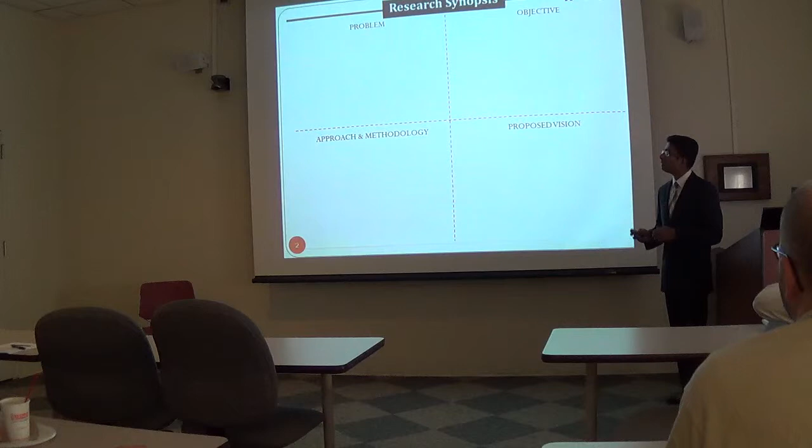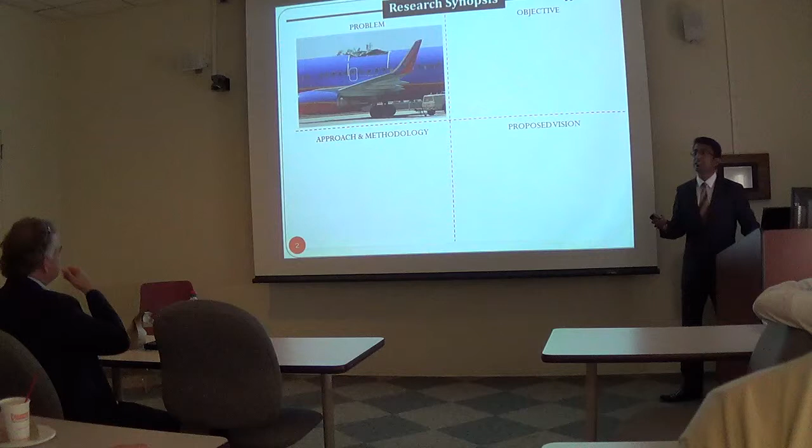Before I get into specific details of my research, I'd like to give a brief description of the research process. Currently, aerospace structures are inspected every year or two, and between inspection cycles this leads to unexpected damage mechanisms because of the complex loading phenomenon seen during the normal span of an aircraft structure. This complex loading profile leads to the development of unexpected damages between periodic inspection cycles. Thus there is a clear need to shift from the current periodic-based inspection technique, which relies on a number of years or flight hours, to a more thorough approach.

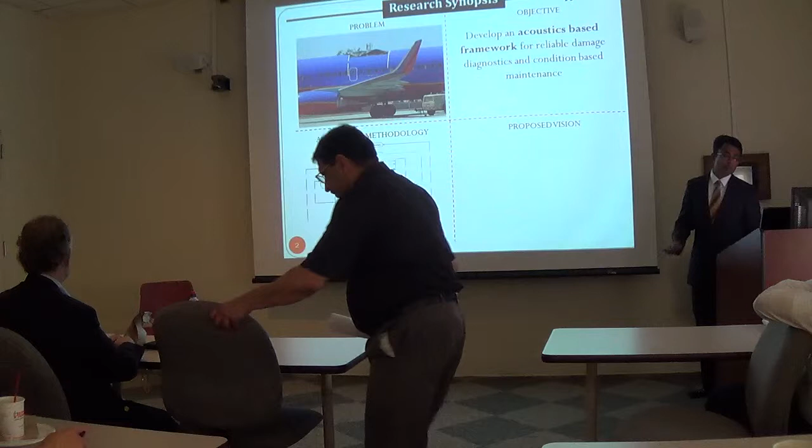So this is the outline of the talk I'll be following today. I'll begin by giving a brief motivation and introduction into the acoustic emission method. Then I'll talk specifically about the novel NDE framework I'm utilizing in this research and show how this framework is used for 4 different cases.

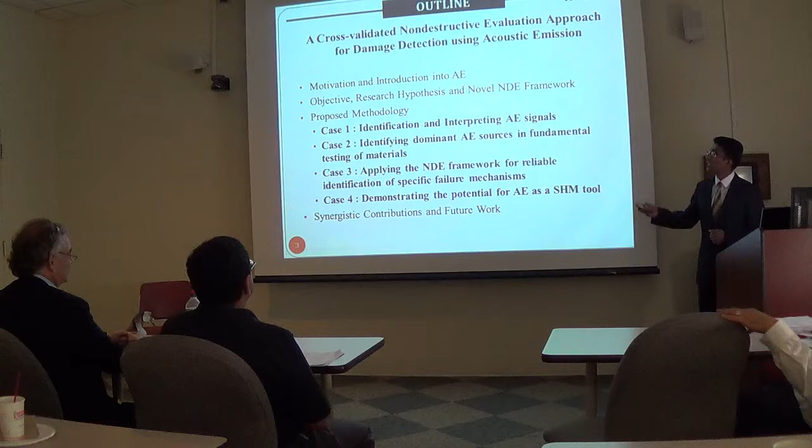And finally, conclude by highlighting some of the major contributions of this work.

As I mentioned previously, the complex loading phenomenon experienced by an aircraft during its normal service life leads to the development of unexpected damages between periodic inspection cycles.

A case in a recent example is the mid-air rupture of a Southwest airline in April 2011, when a section of the roof of the aircraft flew off in mid-air, causing massive depressurization. Notably, a comprehensive D-check was performed on this aircraft prior to this incident, and no ominous signs of cracking were detected during this process.

Thus, there is a clear need to shift from the current periodic-based inspection techniques to condition-based inspection techniques that in real time pick up damages and can reliably provide the physical integrity of the structure.

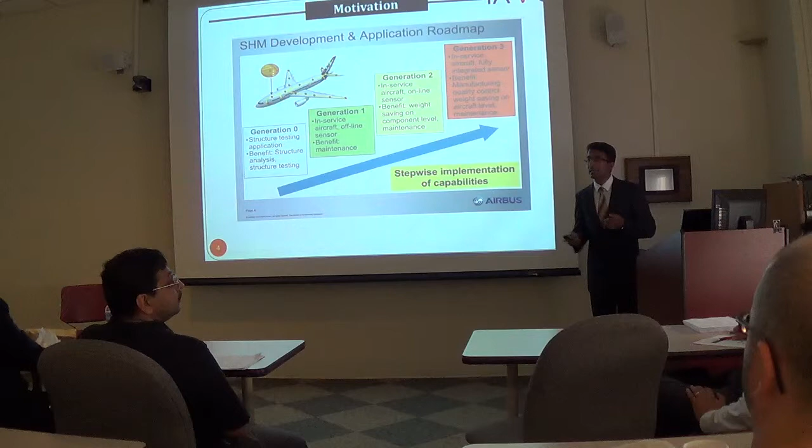Along these lines, Airbus has now developed a future roadmap for structural health monitoring of its aircraft with the ultimate goal of applying onboard sensors to detect in real time the damage diagnostics of its future aircrafts.

However, this research is motivated specifically by a 3-year research grant that was provided to us by the Office of Naval Research to particularly investigate and identify the initiation of cracking in metallic specimens.

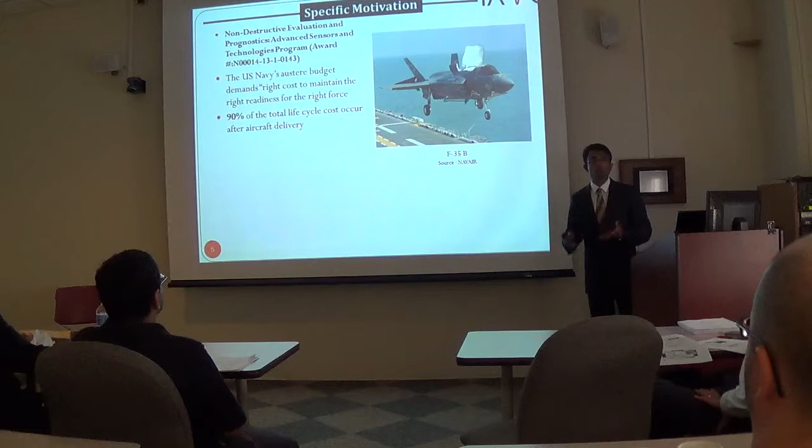The motivation behind this was driven by the fact that the Navy wanted to find the right cost to maintain their fleets, where they found out that at least more than 90% of the total life cost was associated after the aircraft delivery. Consequently, the Navy also designed the structural health and usage monitoring program with the goal to continuously monitor their aircraft structures and also prevent Navy fleets being retired much earlier than their expected fatigue life.

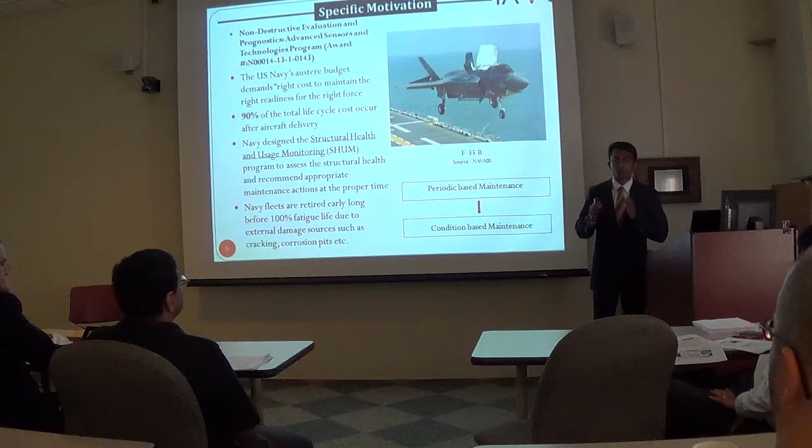So very similar to the commercial sector, the Navy also wants to shift from periodic-based inspection methods to a condition-based maintenance approach that provides targeted evaluation and real-time information about the integrity of the structure.

So in order to realize these condition-based maintenance procedures, there is a need to shift from current offline inspection to online-based inspection techniques. For this purpose, we utilize structural health monitoring approaches.

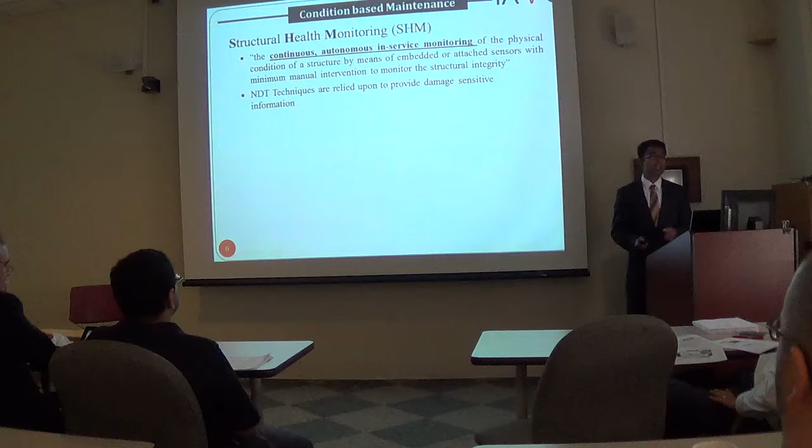Structural health monitoring is the process of applying continuous, autonomous, in-service monitoring of the physical integrity of the structure by attaching embedded or attached sensors with minimal manual intervention to monitor the integrity of the structures.

Now, in order to identify certain damages, certain NDT techniques are utilized to provide sensitive information about the damage. But a clear distinction must be maintained between non-destructive evaluation and structural health monitoring.

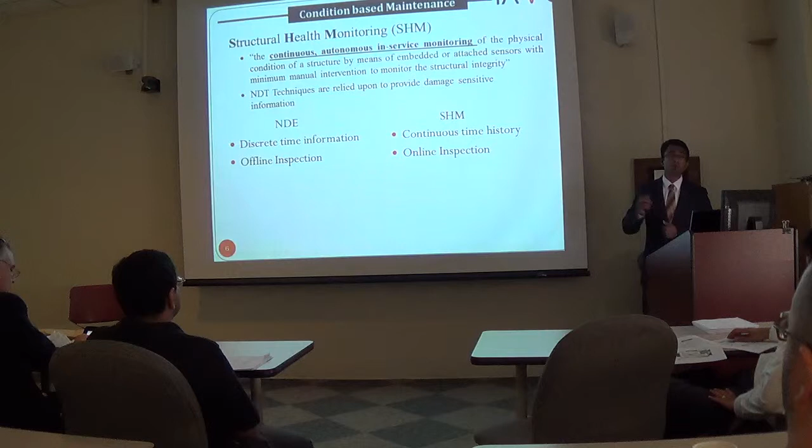Non-destructive evaluation typically provides discrete time histories about the damage in the material, while structural health monitoring approaches provide a more continuous time history about the physical integrity of the structure, and thus can be utilized for both initiation and the development of damage.

The other difference between NDE and SHM techniques is that NDE methods are typically carried out during offline inspection, while structural health monitoring approaches are carried out during in-service or online monitoring, and thus can provide early signs of catastrophic failure and ensure public safety and structural integrity.

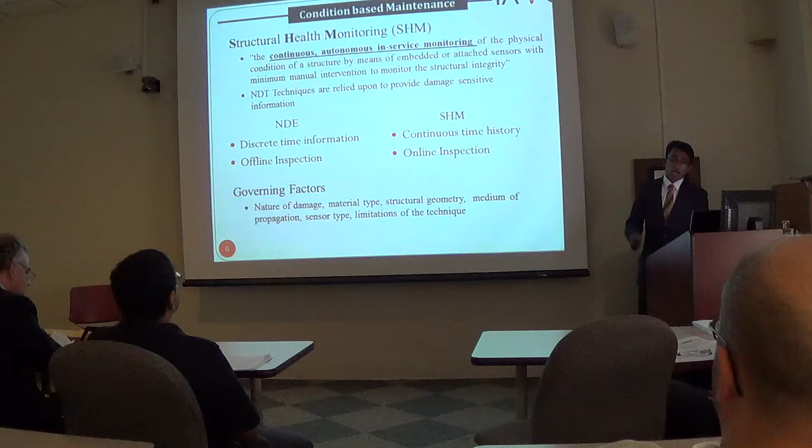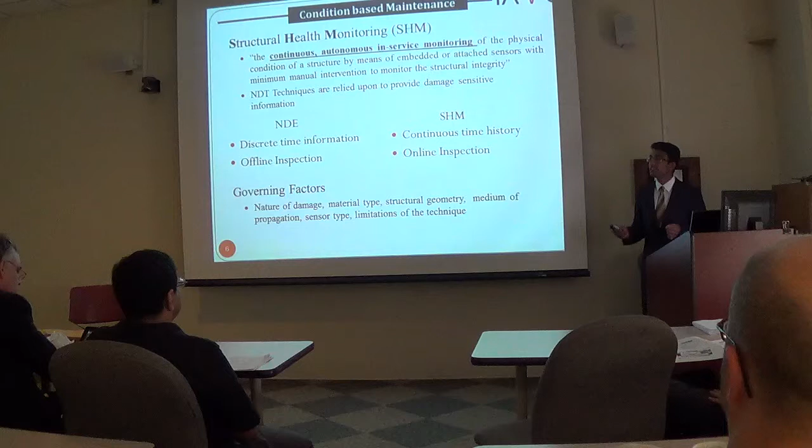Nevertheless, in either approach, in order to optimize the damage detection procedures, certain factors must be considered, such as the nature of the damage to be investigated, the material type, the structural geometry, the sensors, and also the limitations of the applied technique itself.

So some of the commonly seen damages in aircraft structures, for example in metallic structures, range from crack initiation to crack growth to impact damage and corrosion. In composites, the prime failure mechanisms range from debonding to delamination, moisture and water penetration, and other damage such as impact.

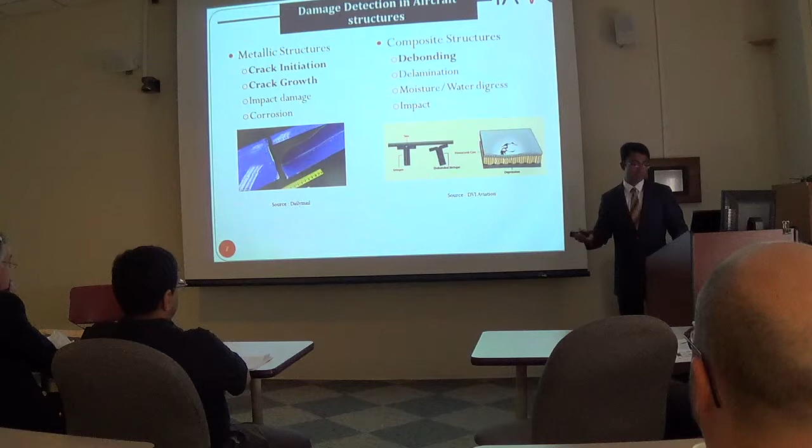Now, in order to pick up these damages, the commonly used NDE methods currently range from visual inspection to ultrasonic testing, thermal imaging, eddy current, and also acoustic emission testing.

Perhaps among these techniques, acoustic emission testing is the only technique that can detect both the initiation and the development of damage in real time, and thus provide a basis for implementing condition-based structural health monitoring approaches.

Secondly, acoustic emission can also be utilized in real time to detect the region or location of damage, which can then be used as an intelligent method to deploy other extensive NDT methods to specifically look at certain regions, thus saving time and cost for damage inspection.

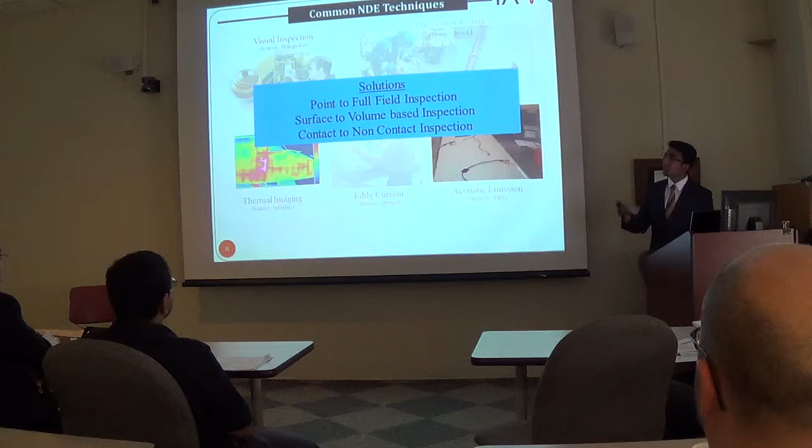These solutions range from point to full field inspections, surface to volumetric-based inspection techniques, and also contact to non-contact inspection techniques.

As acoustic emission technique has the potential to shift from the current offline inspection process to an online inspection process, acoustic emission testing is utilized as a prime monitoring technique in this research.

Before I show some of the specific results that I've obtained during the AE testing of the different materials, I would like to touch base on the concept of acoustic emission. Acoustic emission is the release of transient elastic stress waves produced by the material as it is being stressed due to localized sources such as yielding, twinning, cracking, debonding, and so on.

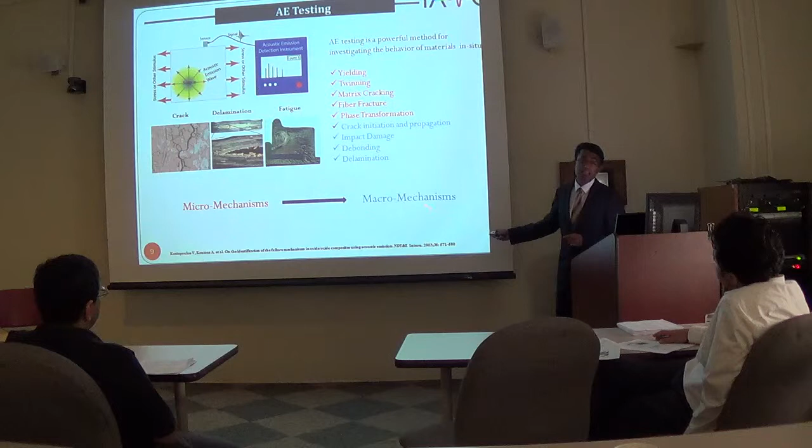What is more important to note is that the same acoustic emission testing technique can be utilized in real time to detect both the micromechanisms and the macromechanisms, which forms the basis of identifying initiation and the development of the damage.

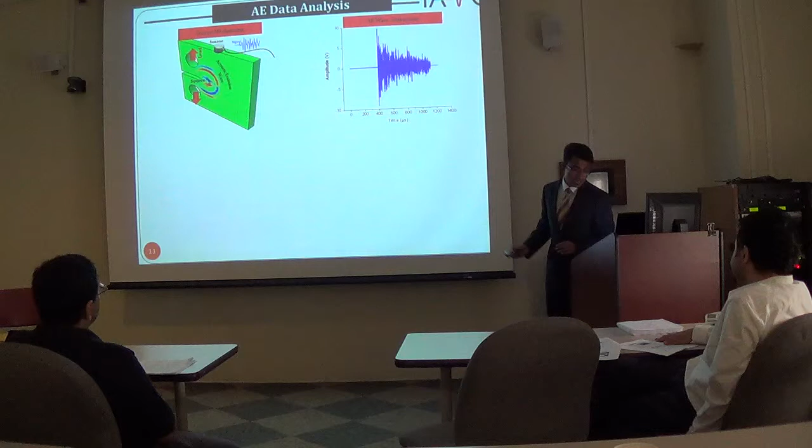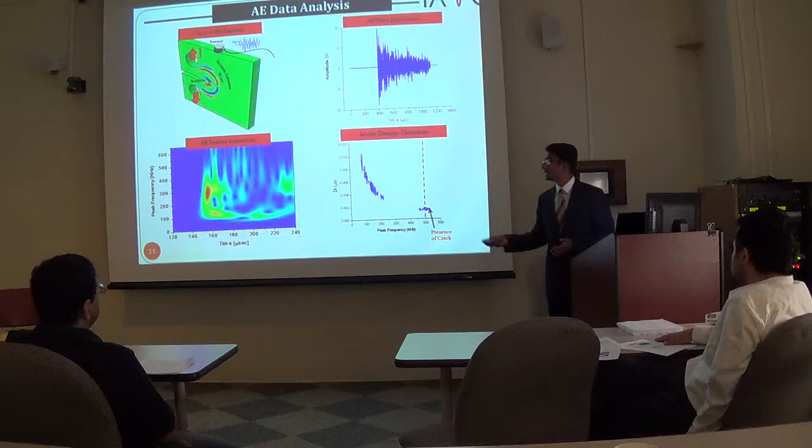And the waveforms that are detected are of similar characteristics as the one shown here. Advanced signal processing techniques are then applied to extract features such as frequency analysis and other types of analysis, and hopefully design novel AE damage detectors to reliably flag the presence of damage for real-time applications.

Now, the commonly extracted AE waveforms during the testing fall into two basic categories: one is the burst type emission, and the other is the continuous type emission. The burst type emissions have a signature as shown here, with very little activity in the pre-trigger, while the continuous acoustic emission have an AE signature as shown here.

Now, based on these extracted AE waveforms, several AE features are extracted using signal processing techniques, and these are some of the commonly used AE features that are cited and used for different AE analysis.

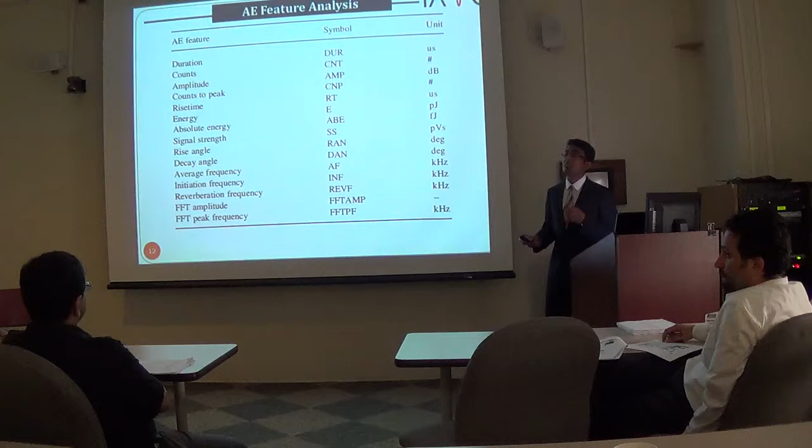However, in our research, I wanted to go a few steps further and develop both novel AE descriptors and also advanced AE feature descriptors that are reliable to damage detection.

So for that purpose, the AE waveform that was extracted during the test was comprehensively analyzed and shifted to the frequency domain using FFT algorithms.

So in addition to picking up the peak frequency, other advanced frequency analysis was also performed to identify the frequency centroid.

Further, the FFT algorithms were then dissected carefully into four specific spectral ranges, and the percentage of energy in each of these spectral ranges was then calculated and seen to be correlated with the applied loading conditions.

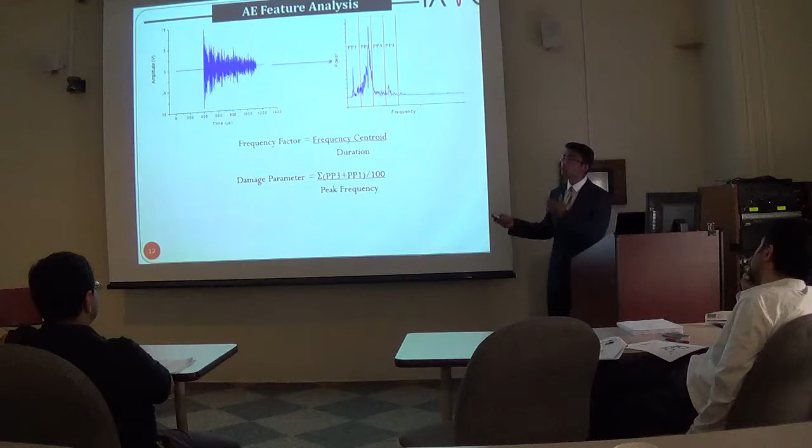Consequently, based on these advanced AE analyses, novel AE feature descriptors were then designed based on the relationship of these features and also the relation of these features to the conventional AE features. These are two of the common AE feature descriptors that I've designed, in addition to a few more.

Now, the other important factor that's supposed to be understood with acoustic emission testing is the actual AE wave phenomenon that happens in the material. To ensure the reliability of damage detection using acoustic emission, it is important to understand how the waves are produced and propagated in the material.

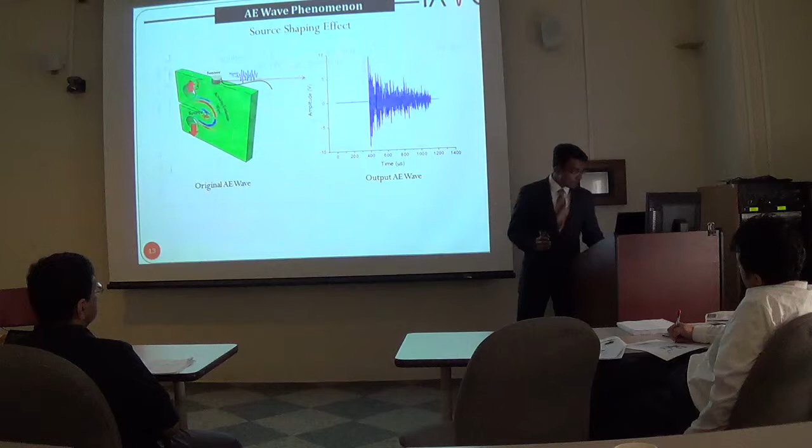For instance, the original AE waveform that is developed, that is produced by the material due to damage, and the final AE waveform that is picked up by the sensor do not share a linear relationship. In fact, the final AE waveform that is picked up by the sensors is actually a convoluted transfer function of several different mechanisms.

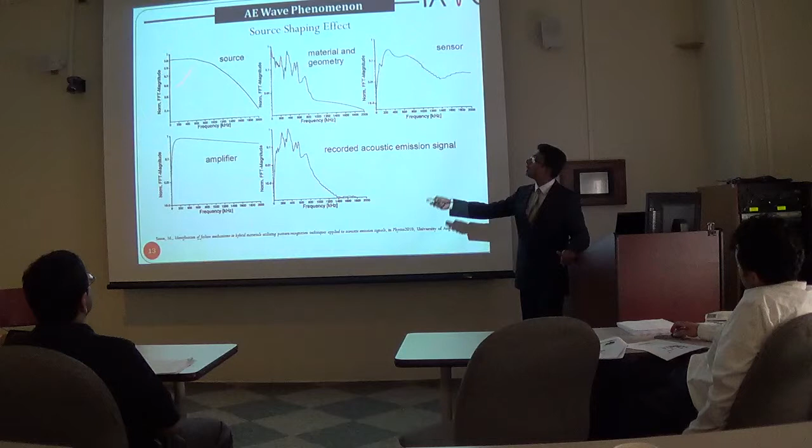For instance, the initial source AE waveform has a frequency characteristic as the one shown here, but as it propagates in the material and the geometry, it is severely colored and affected, which is further affected by the utilized sensor and the instrumentation that is in the test. Thus, the finally observed AE signal is a convoluted function of all these different mechanisms.

And that is in fact one of the main reasons that make acoustic emission a complex NDT phenomenon, and in certain cases very challenging for damage detection for field applications.

Thus, in order to interpret and identify reliably and cross-validate the AE signals that were obtained during the test, a full field optical metrology technique was extensively utilized in this research, which is called digital image correlation.

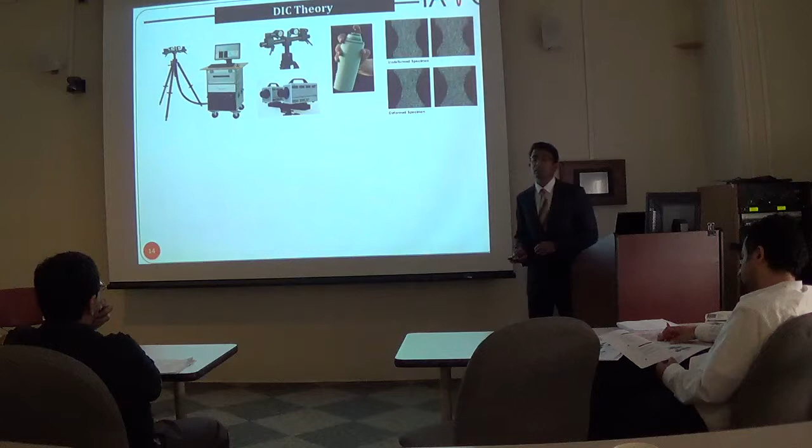The digital image correlation is a full field optical metrology technique that measures the full field deformation and strain on the surface of the structure. A speckle pattern is applied on the surface, and stereoscopic vision is utilized to correlate images before and during the loading phenomenon to obtain the final strain maps and displacement maps.

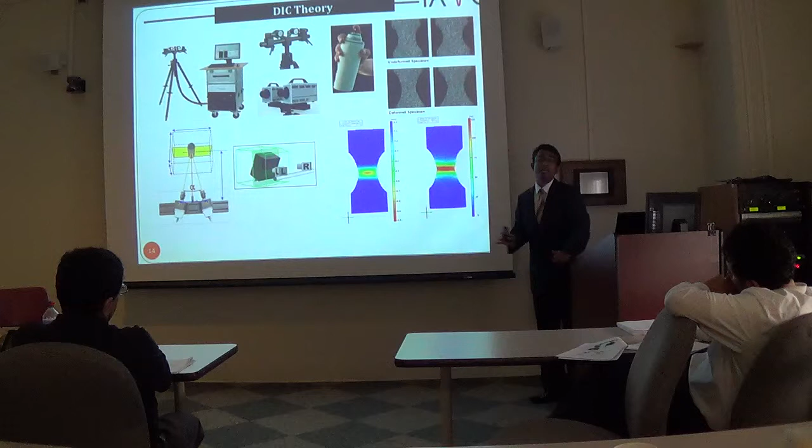So as you can see, the DIC adds a new visual dimension to the interpretation of the AE signals, and can also be utilized to correlate full field mechanical parameters to AE features to reliably validate and interpret the AE signals.

The widespread use of acoustic emission has been mitigated due to several challenges. Four main challenges are related to the high sensitivity to noise, the complex skill required in interpreting and separating the primary or dominant AE sources in the material, the complex wave propagation phenomenon described previously, and finally the lack of developing reliable damage parameters that are irrespective of geometry or loading condition and can be transferred from lab scale to field scale.

In order to address these challenges, this research specifically designed three objectives. The first is the design of a novel, cross-validated acoustic emission NDE system. The second is the development of filtering, post-processing, and classification algorithms to identify reliable trends sensitive to damage. And finally, the identification of failure mechanisms using novel AE damage parameters.

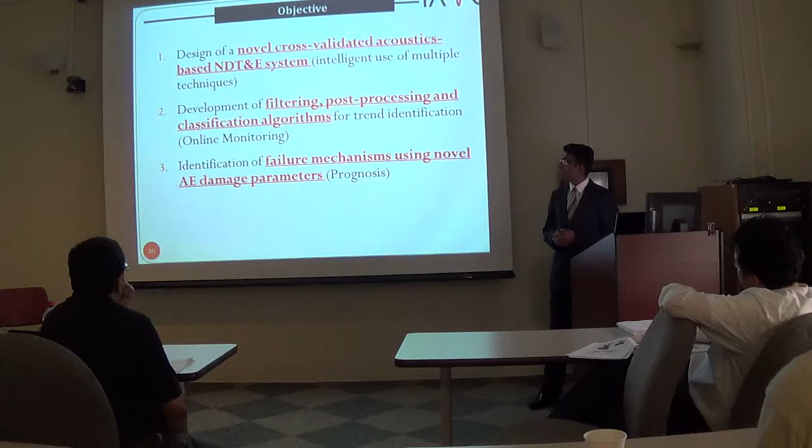The major contributions of this work include three things. The first is the unique hardware integration of the full field technique, the DIC, with acoustic emission itself, using in-house developed hardware protocols where DICs are self-triggered based on certain AE indications with minimal manual intervention. The second is the shift from conventional AE feature analysis to more advanced frequency analysis and the development of novel AE feature descriptors to reliably flag the presence of damage. Finally, the use of multivariate data fusion approaches where features from multiple NDT techniques are combined to reliably quantify damages.

The current state of the art of acoustic emission testing falls into three main categories: operational evaluation, data acquisition, and data interpretation or evaluation, sometimes also referred to as data mining. Specifically, the acoustic-based framework developed comprises four major steps.

The operational evaluation stage is where careful experiments are designed and loading conditions are determined. The second stage is data acquisition, literally the heart of this framework, where unique hardware protocols are developed to synchronize and trigger the full field techniques with acoustic emission testing, which is now being submitted for a patent application and was provisionally published in 2013.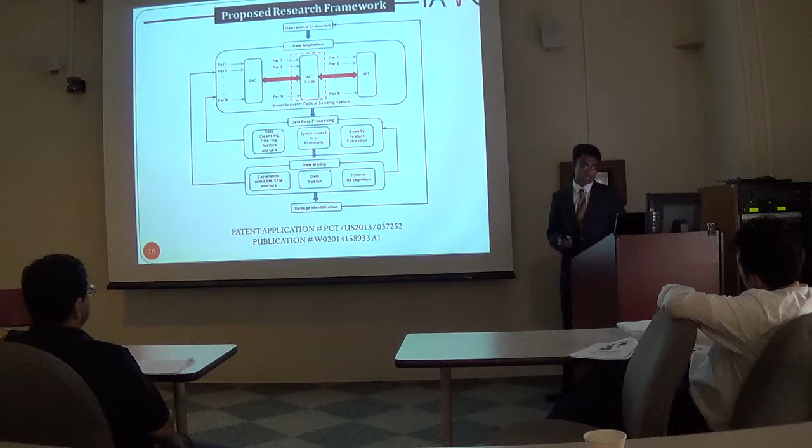To interpret and reliably identify AE sources in material, six critical steps are taken in this research. The first is modeling of acoustic emission waves in materials to understand how the wave propagates and is affected by structural geometry or other features.

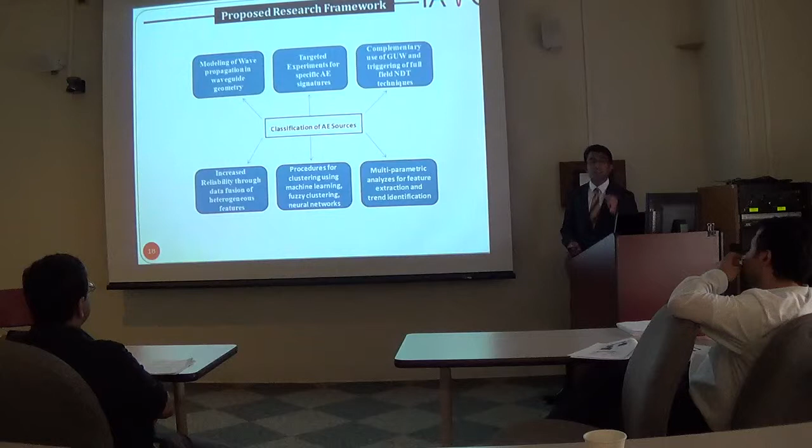Targeted experiments are performed to identify specific AE signatures for damage detection. The third step is the use of complementary full field techniques to aid in interpreting unknown AE signals obtained in real time. The fourth and fifth steps include advanced signal analysis to extract sensitive parameters, with the fifth step including designing novel AE feature descriptors and data fusion algorithms to reliably detect and quantify damage.

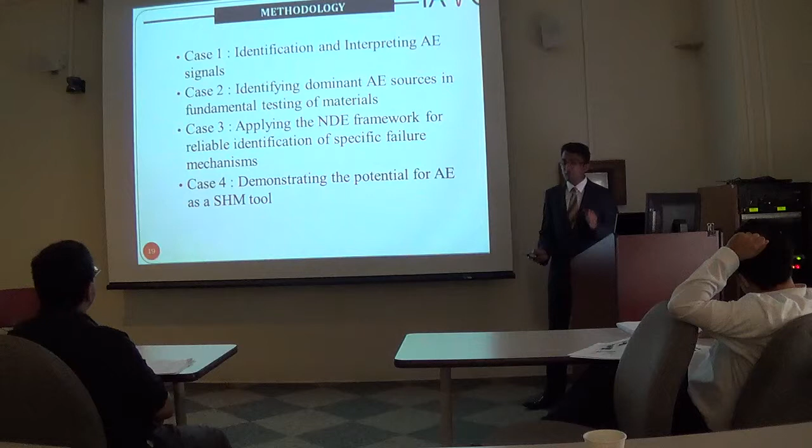The advanced AE feature analysis developed previously was then utilized to see if it has the potential to identify and interpret known AE sources in materials. For that purpose, four known AE sources were simulated on an aluminum 2024 plate.

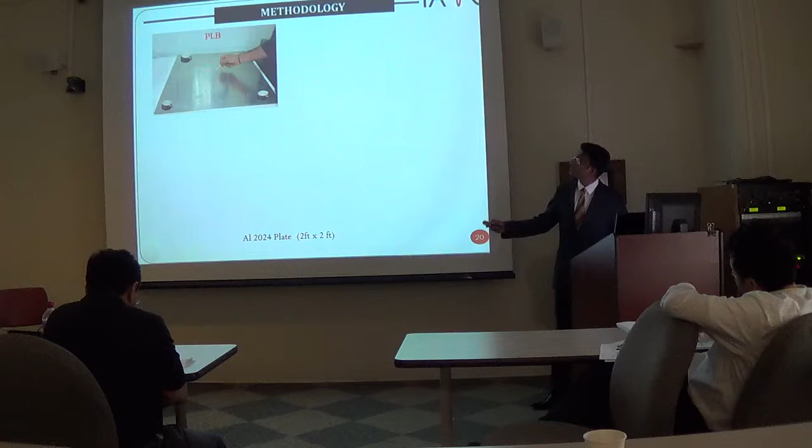The first source was a pencil lead break test, an ASTM standard used to calibrate AE sensors during a test. Four sensors were placed on the edges of the plate, and three other AE sources were also simulated during the test, with sensors placed at the same locations throughout all four sources.

The goal here is to see if advanced frequency analysis or advanced feature analysis has the potential of separating these known AE sources in the test.

Another thing to note is the pre-trigger activity. Signals that have a burst type emission have very little pre-trigger activity, while signals that produce continuous type emissions, such as noise and other secondary sources, have significant pre-trigger activity associated with them. Thus, it is essential to have valid pre-trigger activity in order to separate and provide insight into the potential source mechanisms of the material.

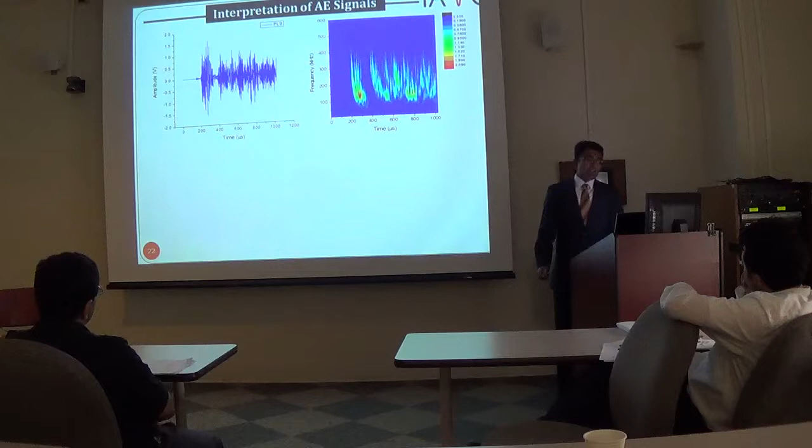To understand if advanced frequency analysis and features could be utilized to separate the four sources, the waveforms were converted into the frequency domain, and the frequency evolution of the waveforms was studied using wavelet analysis as shown here. The initial packet of the waveform was associated with a high frequency, but as it propagates, we start to see low frequency phenomena.

To investigate if the designed frequency analysis can be utilized to separate them, all extracted waveforms were carefully analyzed, converted to frequency analysis, and spectrally dissected into equal ranges to calculate the partial power analysis. It was seen that the partial power analysis was indeed successful in separating the four different AE sources in the material, providing confidence in utilizing this analysis to separate and interpret AE signals.

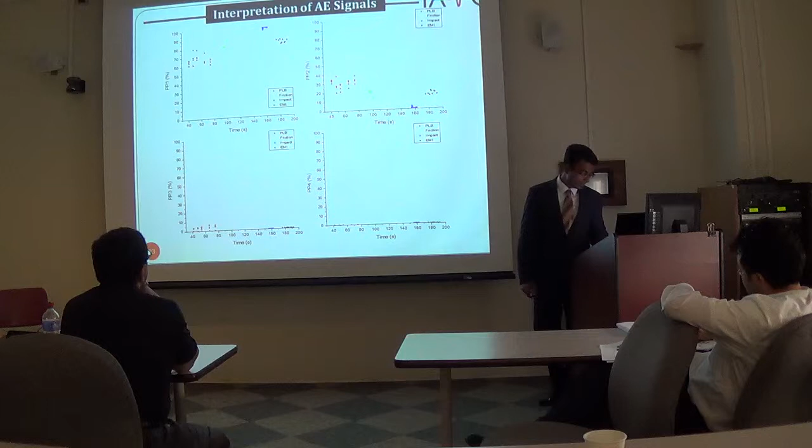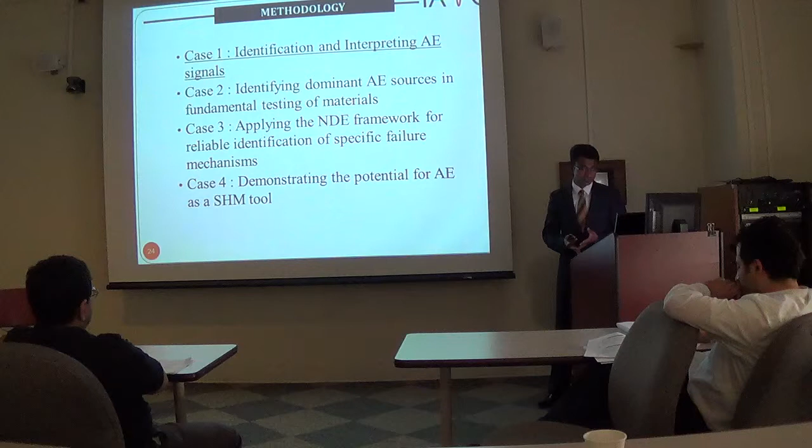This was then utilized to see if these analyses can identify dominant AE sources during fundamental testing of materials. For this purpose, mechanical testing was carried out across different metallic materials, and the first test performed was with the AZ31 magnesium alloy.

This test was repeated and the same phenomenon was observed. Thus, for a future test, the test was designed so it was interrupted based on the activation of this AE amplitude in real time.

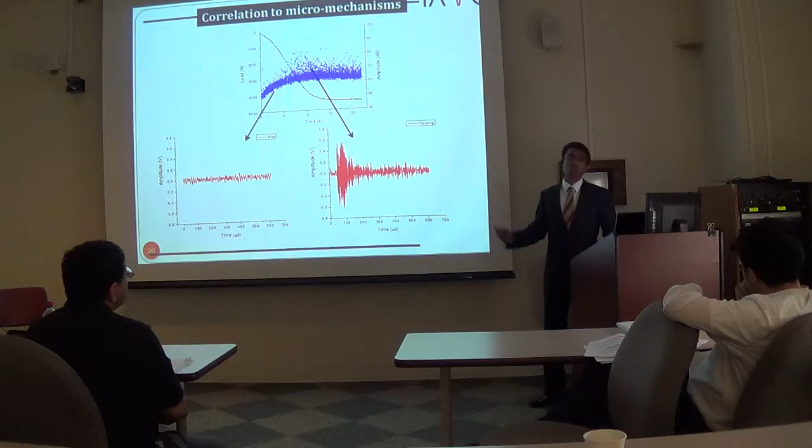To understand the cause behind the shift from continuous type emissions to burst type emissions, detailed microscopic analysis was performed on the specimens. Exactly where the localized strain bands were picked up by the DIC, microscopic analysis was performed both on the localized strain bands and outside the strain bands.

For example, the region inside the strain band, which is band 4, you can see is clearly full of a specific micromechanism called twins, as you can see here.

While the regions outside the strain band, for example region 6, seem to be much clearer of twins. Thus, you can see how these strain bands were actually indicative of localized micromechanisms that activated the material. But what is important to see is how the AE wave signatures, collected in real time, were also able to track this evolution of the active micromechanisms in the material.

Now, in order to see if advanced frequency analysis can be utilized to track this evolution, partial power analysis of the waveforms was extracted and applied, and can be clearly seen after the 6 seconds where we noted the activation of localized strain bands. You can see a shift from higher values of partial power 1 to lower values, while partial power 3 is seen to increase from its initial lower value to a higher value.

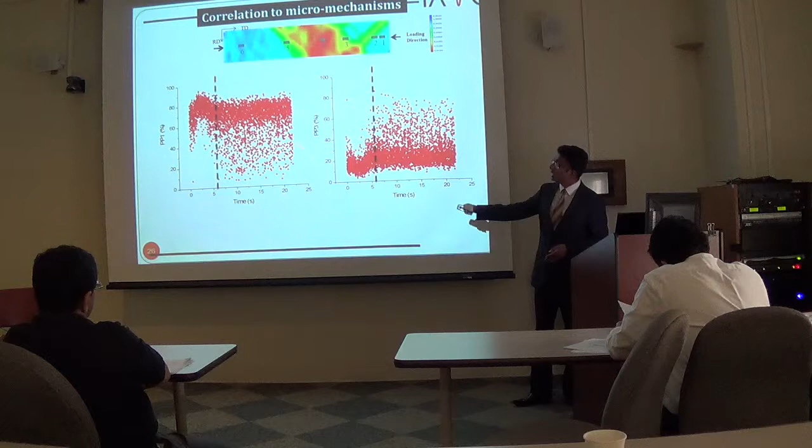What this means is that the low frequency signals decrease after activation of the twinning mechanism of this material, while high frequency signals activate and dominate after the twinning mechanism. Thus, we can see how this sort of analysis can track in real time the actual evolution of the micromechanisms in the material.

Now, the whole goal was to see if this analysis can be utilized to detect crack initiation and growth in aluminum alloys, as was the objective with the ONR work. For that purpose, mechanical test specimens of aluminum 2024 were tested in tension, and prior to applying a load, ambient environmental conditions were recorded using acoustic emission as shown here.

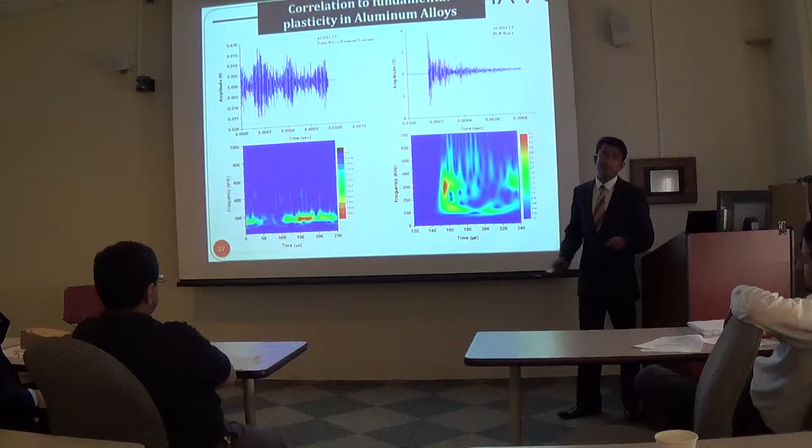So the initial gripping of the specimen did produce an acoustic emission signature of continuous type, which also shows great resemblance to the friction waveform seen previously with the experimental simulation of sources. You can see again that the frequency features are very similar to what was seen previously.

Now, in accordance with ASTM standard E976, pencil lead break (PLB) tests were performed on these specimens to calibrate the sensitivity of sensors. It can be seen that the PLB waveforms again have characteristics very similar to the ones shown previously. The frequency analysis indeed shows the initial high frequency followed by subsequent low frequency.

So the mechanical testing of the aluminum alloys was carried out, and it was loaded in tension until failure, as you see here. And what was seen in real time was that the AE features correlated to the applied loading condition were very interesting.

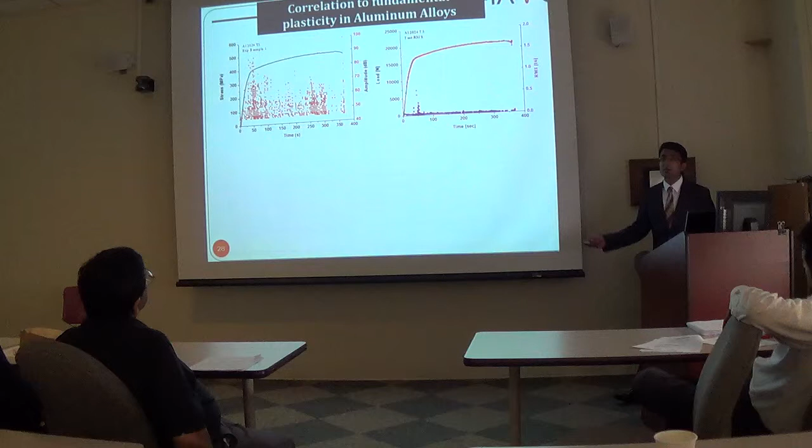Right at the point of yielding, you could see high amplitude AE signals being generated, as well as high RMS values. The signals corresponding to the high amplitude at the point of yielding had burst type emissions. These burst type emissions were not seen in signals picked up prior to yielding. So again, similar to the AZ31 alloy, you can see a shift in the actual wave signature upon yielding of the material.

Now, DIC was then utilized to help us understand exactly the onset of cracking in the aluminum alloy. As you can see here, as the strain maps increase and the crack starts to initiate, you can see a jump in the AE counts picked up, both in the cumulative counts and in the instantaneous counts.

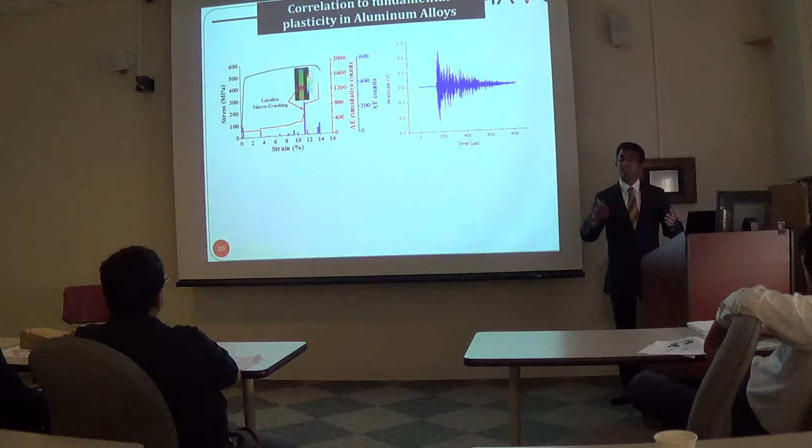This was then utilized to understand the AE waveforms associated exactly with this region. It was seen that the AE waveforms associated with cracking were very similar to those at yielding, but had much higher amplitude and shared a burst of emissions.

Now, to see if the AE features can be reliable in detecting damage during fatigue testing of these materials, several fatigue parameters such as energy density, stiffness, and strain were extracted independently from the DIC and correlated with the extracted AE features.

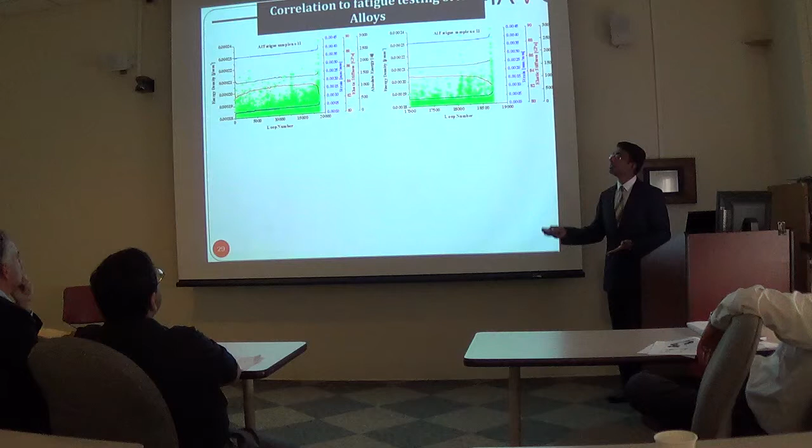As you can see here clearly, AE testing during fatigue usually produces a large set of AE data, and so it's quite complex to understand exactly what each source corresponds to. So the full field DIC parameters that are extracted are then utilized to interpret the AE features collected in real time.

This graph shows the zoomed in version of the last few stages. Right as you see the stiffness and strain change, you can see the release of high absolute energy signals as well as high AE amplitude signals.

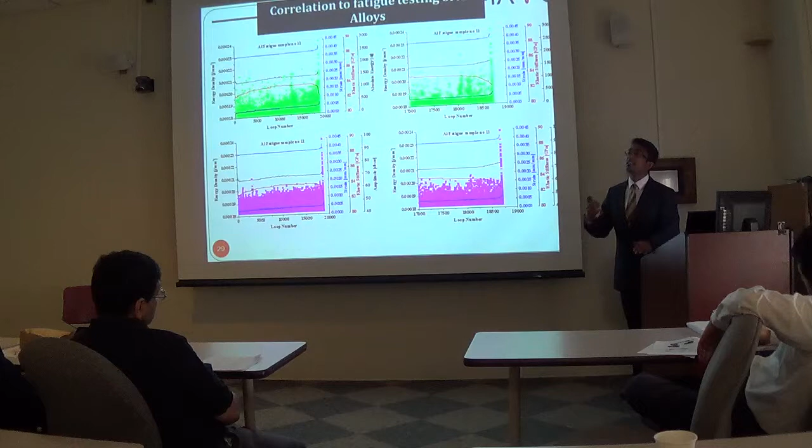But what was more interesting was how there were early indications of absolute energy much prior to the strain and stiffness picking it up. Thus, acoustic emission provides an early indication of fatigue damage in the material.

The finally extracted AE waveforms were compared to the tension AE waveform associated with the cracking identified with the help of DIC. The waveforms extracted towards the end of the fatigue test had a very similar AE wave signature, and the frequency analysis was also seen to be very similar.

In order to classify and separate the AE signals obtained during fatigue testing, pattern recognition algorithms were applied to separate them into several different classes, and potentially associate these classes with certain sources.

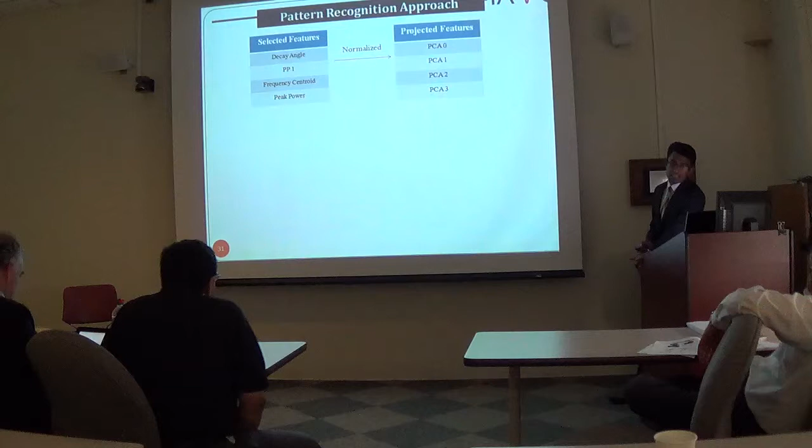Four different AE features were utilized: the decay angle, partial power 1, frequency centroid, and peak power. These features were normalized and transformed to an orthogonal basis using principal component analysis. Only the first 3 principal components were utilized, as these vectors constituted 90% of the AE data in the test.

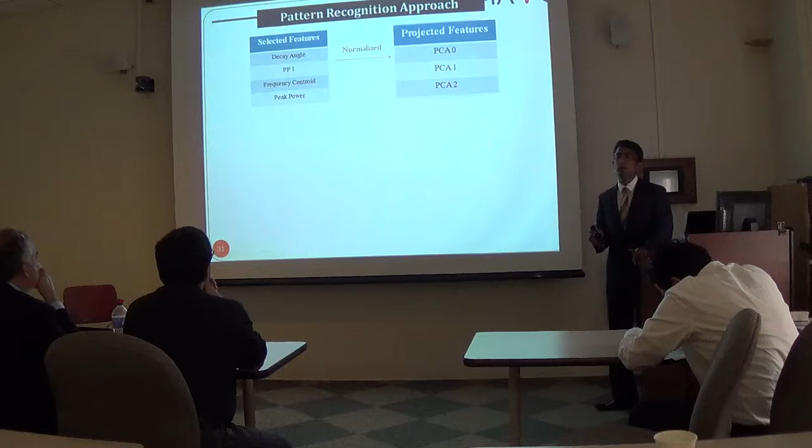Statistical pattern recognition algorithms were then implemented, specifically the k-means algorithm, to classify and separate the different AE signals into several classes.

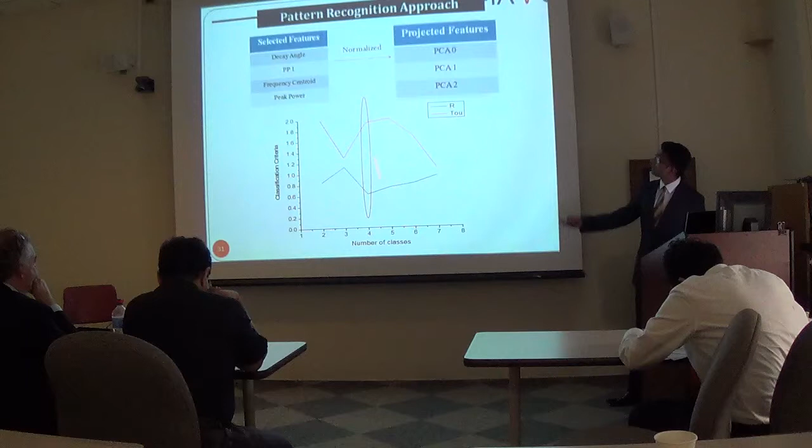The compactness and validity of the classification process is evaluated using R and tau criteria, which indicate that a small value of R and a high value of tau signify good separation of classes. It can be seen that 4 classes showed a good classification methodology.

In order to put these classes into perspective and understand how they activate in the material, the classes were correlated to the applied loading condition, showing how different classes are activated at specific load intervals.

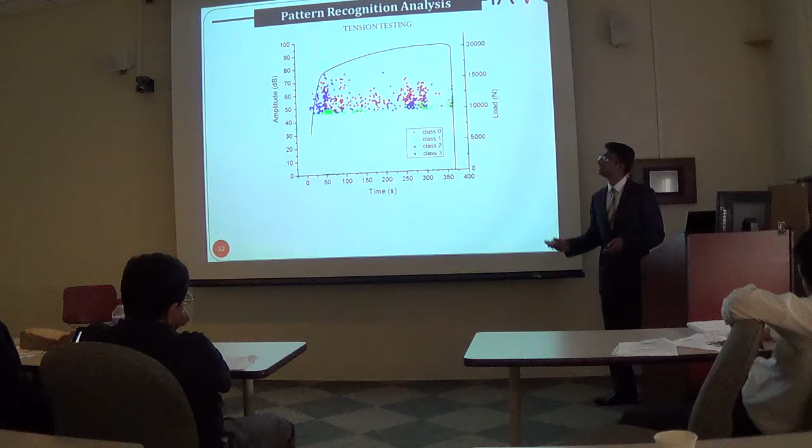Initially at yielding, the green class, class 1, is seen to be dominant, while prior to yielding, the blue class, class 2, was more dominant and picked up. The class 0 signal, the red class, significantly increases post-yielding and then dominates the post-yielding behavior.

The same pattern recognition analysis was then repeated on fatigue testing of aluminum alloys, and very similar AE feature characteristics were identified across different fatigue specimens. This forms the basis for developing a robust classification algorithm to potentially identify damage sources in these materials, irrespective of loading conditions.

This framework was then applied to specifically identify targeted failure mechanisms, such as the one specified by the ONR, where the goal was to identify crack initiation in aluminum alloys. This framework was then applied to reliably identify crack initiation in aluminum alloys.

For that purpose, compact tension specimens were designed and experimentally tested. But prior to experimentally testing the compact tension specimens, acoustic emissions were modeled using finite element analysis to see how the acoustic emissions are produced due to crack initiation, and how they interact with structural features and affect the actual wave phenomenon.

If I go ahead and play the video, you can see how the acoustic emissions are produced as the crack propagates through the material, and how it gets affected as it hits or interacts with structural geometries and boundaries.

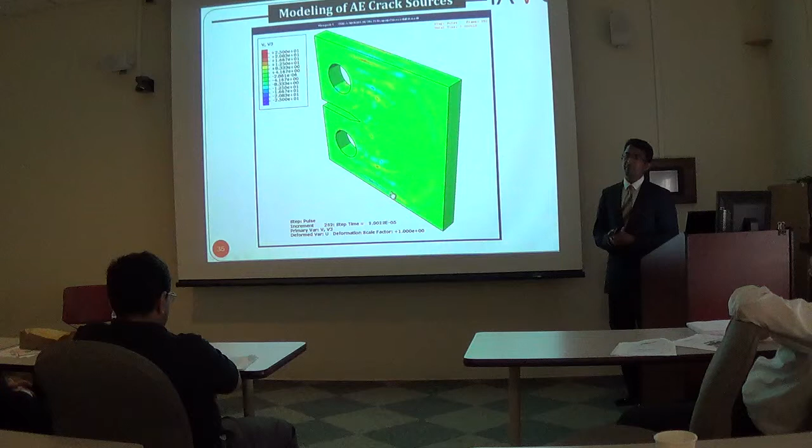What was important to see is how the AE waveforms actually had circular wavefronts, as seen here. You can see that the AE waveforms do indeed have circular wavefronts, very similar to the earthquake phenomena that are produced.

So the signals picked up right close to the crack are plotted here. You can see that the signal picked up right next to the crack had a burst type emission, with the initial packet having a very high amplitude. But upon interaction of the waves with the pin, the amplitude actually decreases, as you can note here, and this further decreases as it interacts with the geometry of the specimen itself. This tells us that utilizing threshold-based or amplitude-based analysis for reliable damage detection might not be very reliable, because these features clearly change as they interact with the structural geometry or material features.

So we need to shift from threshold-based analysis to more advanced AE analysis. In order to understand how waves propagate in the material, 5 different virtual AE sensors were placed on the CT specimen, and the waveforms corresponding to these 5 locations are shown here. It can be seen that the initial amplitude picked up close to the crack seemed to decrease as it propagates in the material, and the time of arrival is also seen to increase as it propagates.

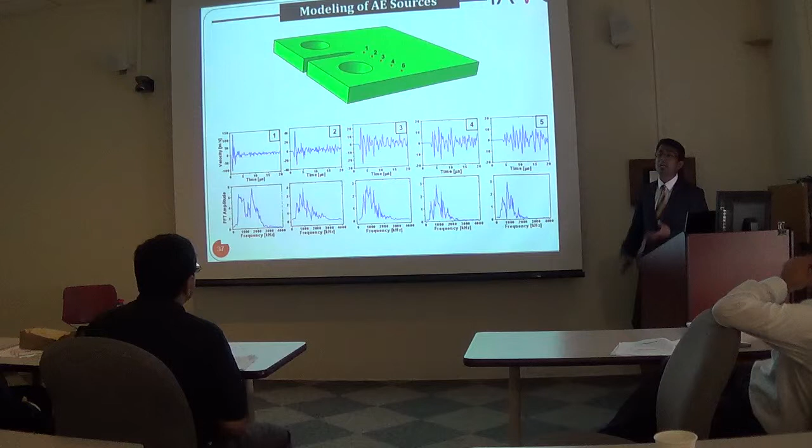This is very important to understand how to place sensors and what the final sensor waveform would look like. But I also want to bring your attention to the fact that, in contrast to amplitude and time of arrival, the frequencies actually provide a much more consistent basis as the waves propagate in the material. You can see consistent frequency behavior as the waves propagate.

Before actually experimentally testing the CT specimens, a preload was applied, about 100 Newtons. At this load, we could still pick up a lot of AE activity, and these are actually noise sources in the environment.

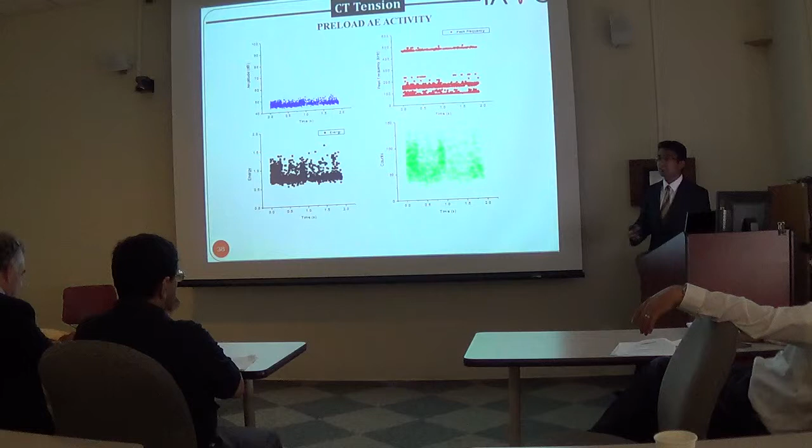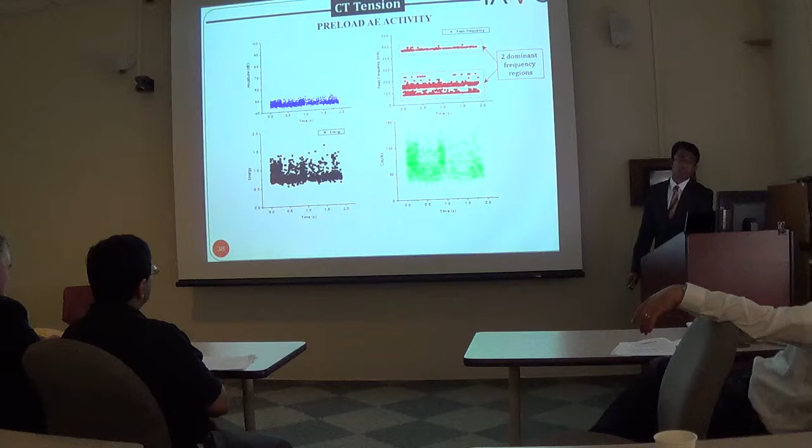However, the AE signals picked up during this preload were characterized by very low amplitude, as seen here, and two dominant AE frequency regions were identified. Notably, frequency signals between 400 and 500 kilohertz and between 100 and 200 kilohertz were noticed. These signals were also associated with very low energy and low counts.

This is the video that was picked up, analyzed using DIC, showing the full field strain accumulation around the crack tip. More importantly, it tells us exactly when the crack initiates, which can then be utilized to interpret the unknown and large AE signals detected in real time. Let me go ahead and play the video.

You can see as the specimen is being loaded, strain slowly starts to accumulate around the crack tip, as shown here. With subsequent loading, you can see how the plastic zone increases, and the strain develops and increases in magnitude.

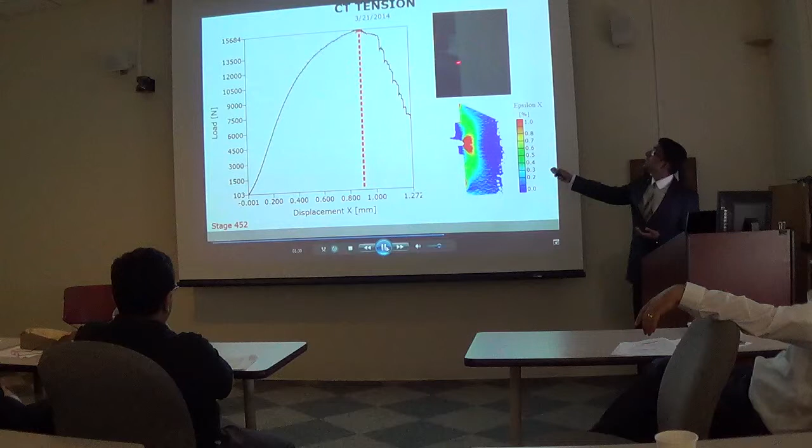This is an actual visual image seen by the naked eye during the test. You can clearly see exactly the point when cracking initiation begins. As the specimen is being loaded, you can start to see how cracks were formed, which was also seen with the full field analysis. This was utilized to see exactly when cracks were initiated in the specimen.

The full field strain maps show how plasticity grows at various points in the load. Exactly at point 5, just after the initial load drop, you can actually see the onset of crack initiation. This was then utilized to interpret and analyze the AE signals.

The signals picked up before and after crack initiation were then analyzed. What I need to bring attention to here is that this is not an FFT analysis of a single waveform, but actually a weighted analysis of several AE signals picked up before and after crack initiation.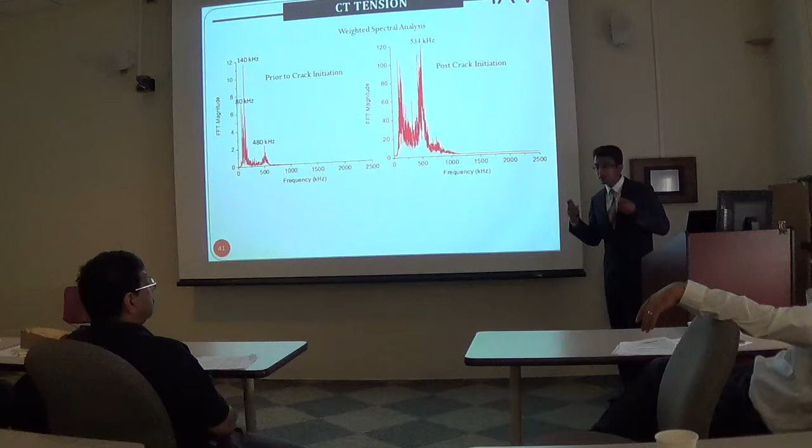So you can clearly see with this weighted spectral analysis, there's a shift in the low frequency signals to high frequency signals upon crack initiation in the material. So this actually forms the basis of confirming that frequency-based analysis does provide an indication of the particular failure mechanism in the material.

Additionally, partial power analysis was also utilized to confirm the crack initiation in the material. The partial power analysis performed with the AE signals collected during the preload activity were seen to be much less than 500 kilohertz, as you can see here. But upon crack initiation, you can see the activation of 500 kilohertz. Additionally, you can see the drop of partial power 1 after crack initiation, while partial power 3 signals increase. This clearly indicates a shift from low frequencies to high frequencies generated due to the crack initiation in the material.

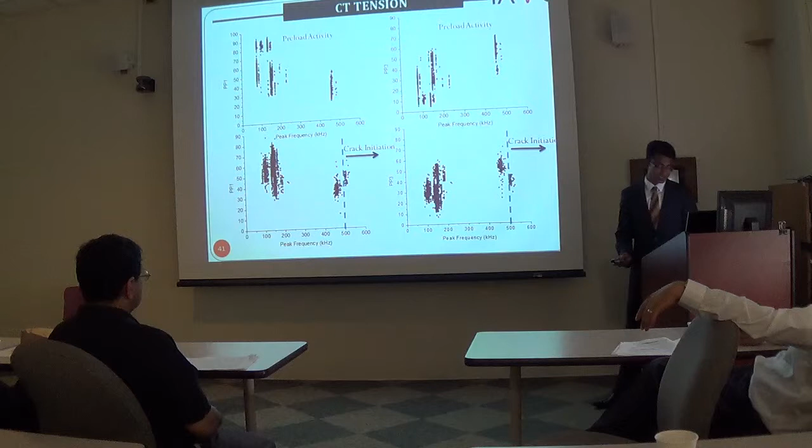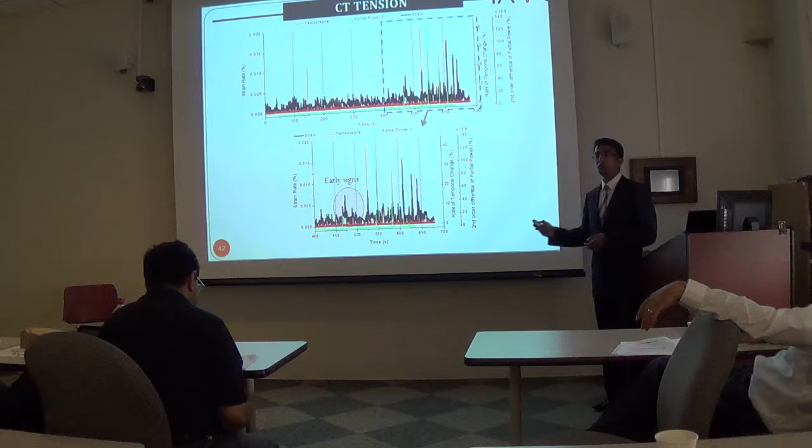Now, in order to confirm that the partial power analysis was sensitive to crack initiation in the material, the partial power analysis was correlated with independent features extracted from the DIC, such as the strain, and the temperature extracted from infrared thermography. It can be seen right at the final stages of the failure how the partial power analysis is coincident exactly with the full field strain values and the temperature change. Much prior to actually visually seeing the crack initiation, you can see early signs of damage using the acoustic emission partial power analysis.

So consequently, in order to develop this robust approach, irrespective of the geometry and loading conditions, to hopefully take it from lab scale to field applications for crack detection, novel AE feature descriptors were designed based on the ratios of the partial power analysis and also the ratio with other features. It can be clearly seen that the signals associated with the cracking fall exactly in the specific region of the damage parameter. So this actually forms the first basis of developing reliable damage parameters using acoustic emission.

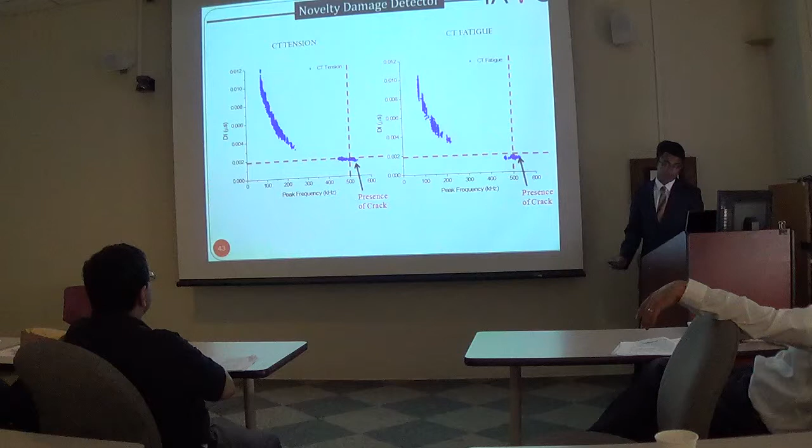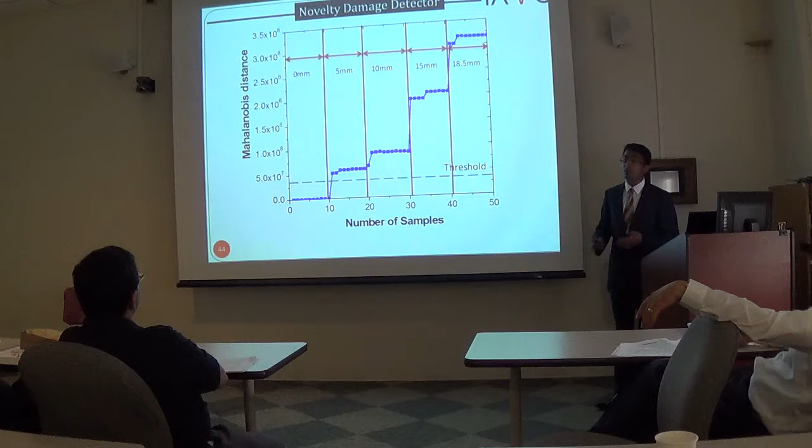And currently in the literature, we don't actually have any damage indexes that utilize acoustic emission signals per se. So, in order to validate the identification of cracking and further quantify the crack growth of the material, features extracted from the DIC and the acoustic features were then correlated using multivariate analysis, such as the Mahalanobis square distance, in order to reliably detect and quantify the crack growth of the material. It can be clearly seen that the Mahalanobis square distance, which is based on certain parameters, is significantly higher as the crack grows in the material, and can be utilized to quantify the crack growth in the material. Also, there are very little false positive signals, and thus this can be utilized as an approach for harsh environmental conditions or field-based applications.

The next goal was to identify debonding in composite skin stiffener components, which was sponsored by the NAVAIR project. In this research, acoustic emission testing was performed in addition to guided ultrasonic waves to identify the onset of debonding in composite skin stiffener components.

Now, further, the AE waveforms extracted at this high amplitude close to peak load provide a very interesting phenomenon. It was seen that the waveforms had this dual frequency characteristic, as you can see here, which would have an initial large high frequency content, and then later on, this dual low frequency content, as you can see here.

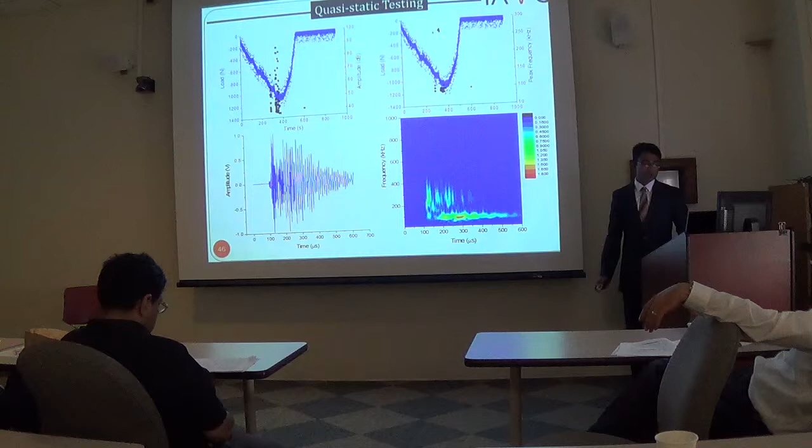So subsequently, the skin stiffener components were then tested under fatigue conditions to see if we could detect the debonding in it. In the quasi-static specimens, there was no visual debonding identified, but there were a lot of audible signs that were picked up. But in the fatigue testing, we could actually see visual signs of debonding, which corresponded to high amplitude AE signals, as seen here.

In addition to detecting them in real-time, location algorithms were also employed to detect the exact region of debonding, but also more importantly to spatially filter the large AE waveforms collected during the fatigue testing of the material. The AE waveforms collected from this location seem to be very similar to the ones picked up from the quasi-static test.

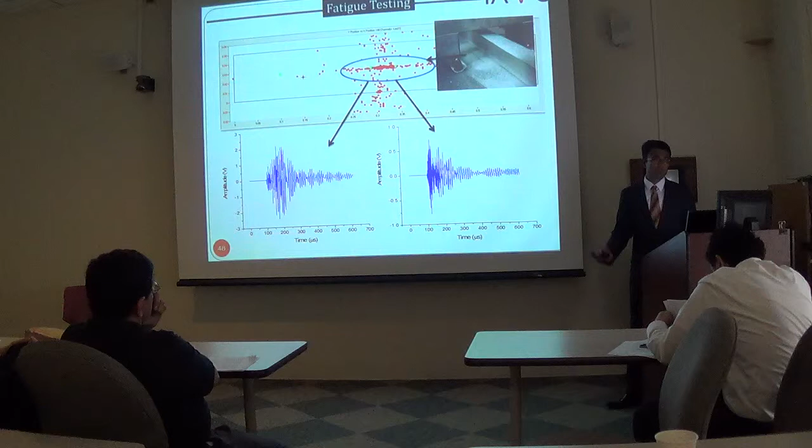You can see that the initial waves are associated with high frequencies, and subsequently with low frequency contents. So in order to develop an AE feature analysis sensitive to the extent of debonding, novel advanced frequency analysis such as the frequency centroid was correlated with duration and plotted as a function of the different applied fatigue loading limits, as you can see here.

It can be seen that as loading increased, signals associated with low frequency centroid and high duration were seen to increase with the subsequent loading in the material.

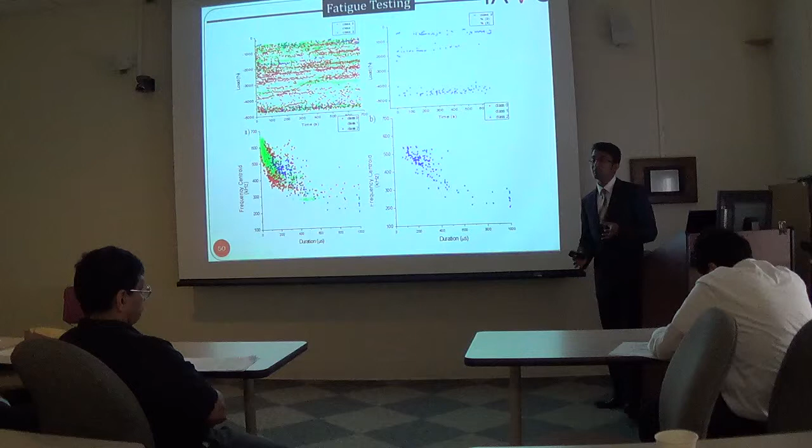In order to separate and potentially identify the source associated with debonding in the fatigue testing of the composite stiffener component, pattern recognition analysis was performed and three main classes were identified.

It can be seen here that class 0 and class 1 signals, shown in red and green, are pretty much active throughout the test. But the class 2 signal is seen to be active mostly during the loading profile of the test, as can be seen here. Further, these class 2 signals are seen to be associated with low frequency centroid signals and high duration, as can be seen here.

Now, in order to understand what perhaps could be associated with debonding in terms of the classes, the AE waveforms representative of the different classes were extracted and analyzed.

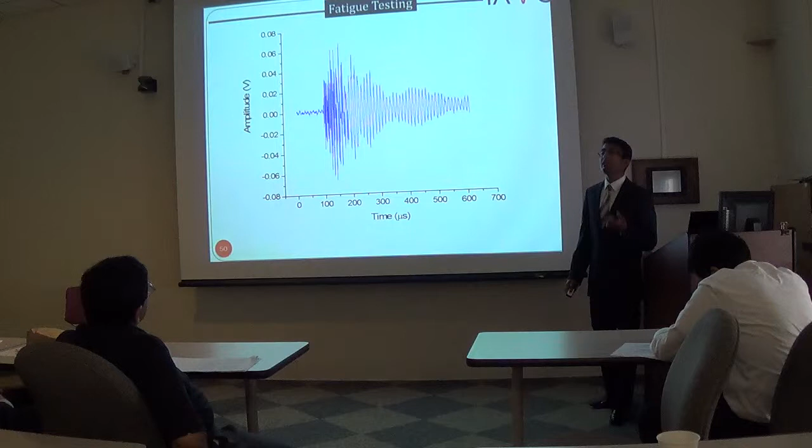The class 0 signals had a burst type emission as shown here, while the class 1 signals were seen to have AE signatures as shown here. But the class 2 signal was seen to have very similar AE waveform signatures to the ones extracted during the tensile test and during the location algorithms performed during fatigue testing of the material.

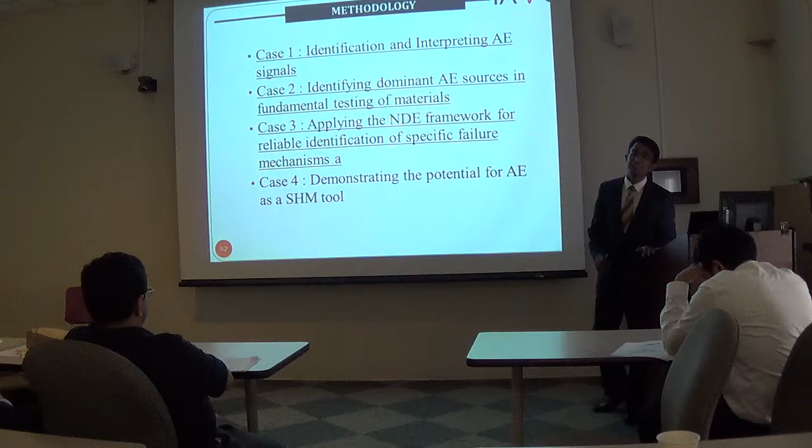So the last goal was to apply acoustic emission testing as a potential structural health monitoring tool for real-time damage detection. This approach is now being applied to a different infrastructure, particularly civil infrastructure, that was tested here at Drexel.

This was then utilized by NSF, which allowed us to go to the University of California San Diego based on our results here, to demonstrate this potential for one-story buildings in San Diego, testing them under earthquake-type loadings. The walls tested here had a 4 meter by 4 meter dimension, so it was a pretty large structural scale, with the loading shown there.

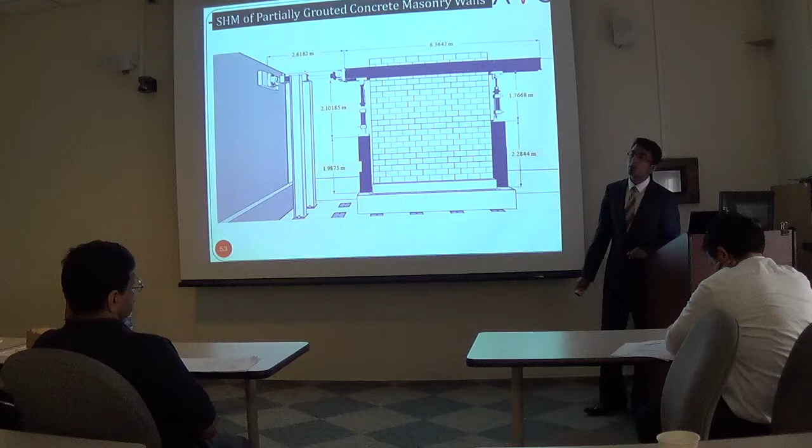The main objective here was to understand the damage development in concrete masonry, partially grouted concrete masonry walls under seismic type loading. For that purpose, the DIC cameras were applied and positioned at a certain distance away from the wall, as shown here, and the acoustic emission sensors were also placed at the back of the wall.

The acoustic emission features were then correlated with the DIC features and further correlated to the mechanical parameters to validate the potential of utilizing them for onboard damage detection.

I'm going to show an interesting video of how the DIC actually picks up early indications of strain accumulation much before we can visually identify any cracks in the specimen. As the wall is being loaded under tension and compression, you can see how the strain accumulates in the medium.

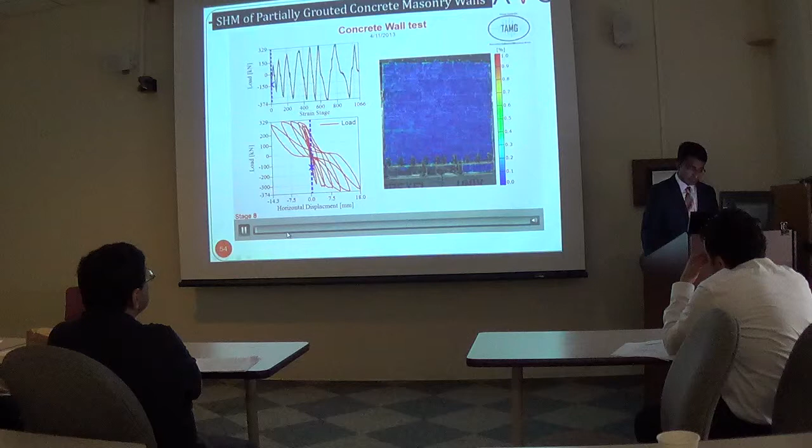As the wall is being loaded, you can start to see how strain accumulation is seen to pick up in specific regions of the wall. And at this point, we still...